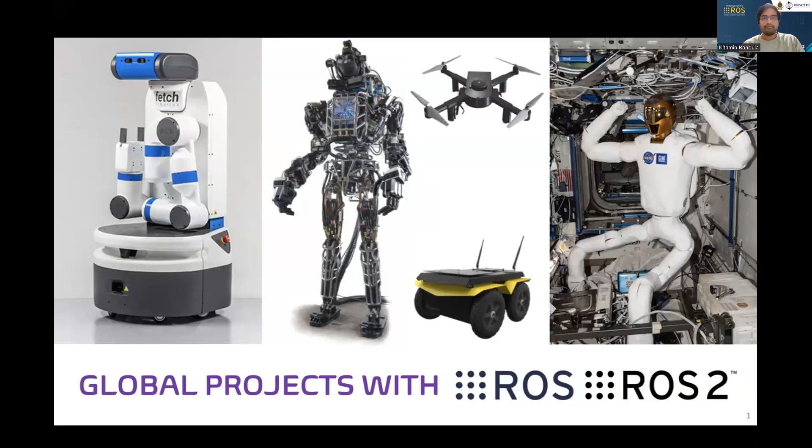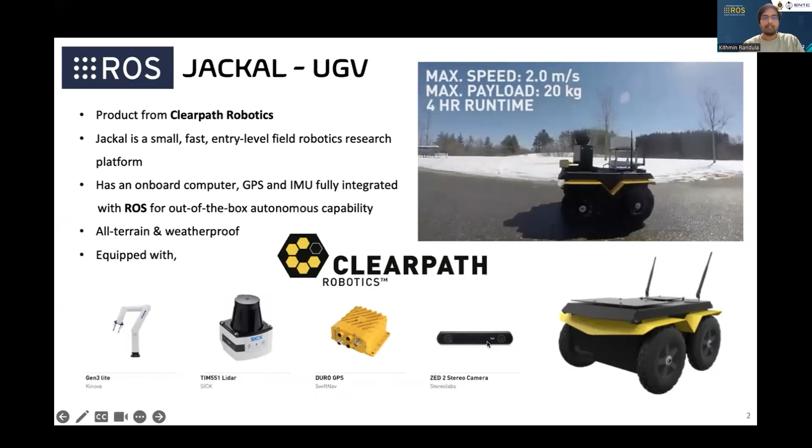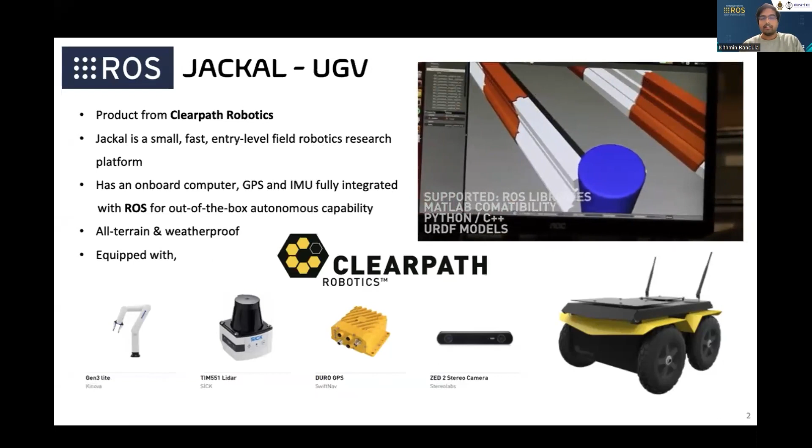The first project I want to present is done by Clearpath Robotics. It's a product, an unmanned ground vehicle called JACKAL, a fast-moving robotics research platform equipped with cool features like a manipulator, LiDAR sensor, GPS, and stereo camera. It's an all-terrain, weatherproof device, quite neat. Clearpath Robotics is located in Waterloo, Canada, and it's a startup that came out of University of Waterloo.

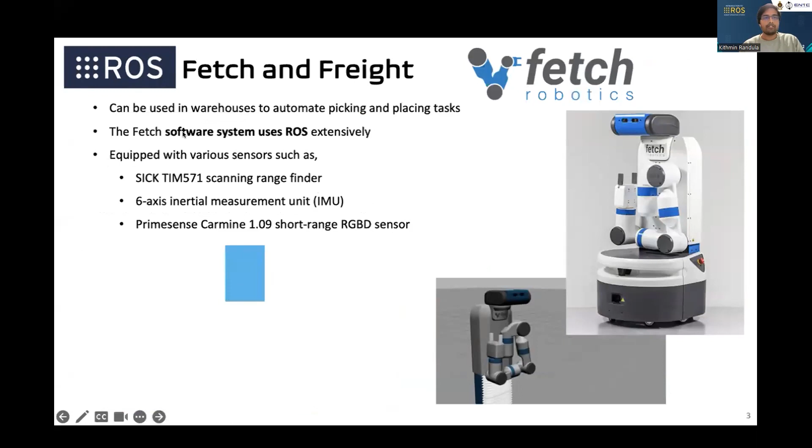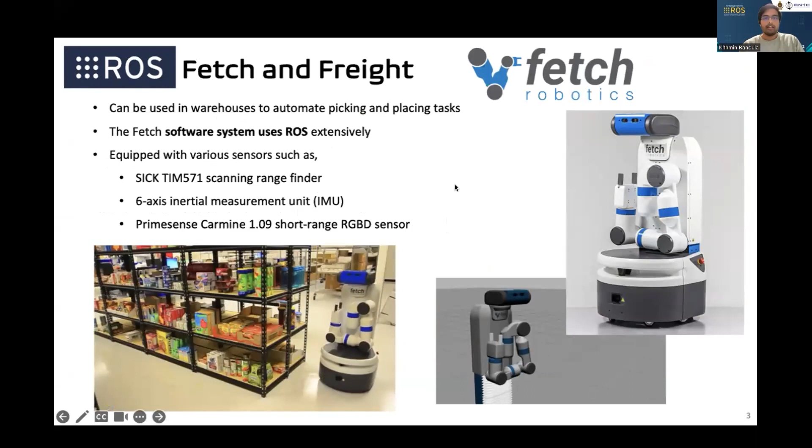This robot is very handy, used in warehouses for automatic picking and placing. It's called Fetch, developed by Fetch Robotics, and it's available in ROS, extensively using the ROS platform. It has a rangefinder, IMU system, and a short range RGBD sensor for color detection.

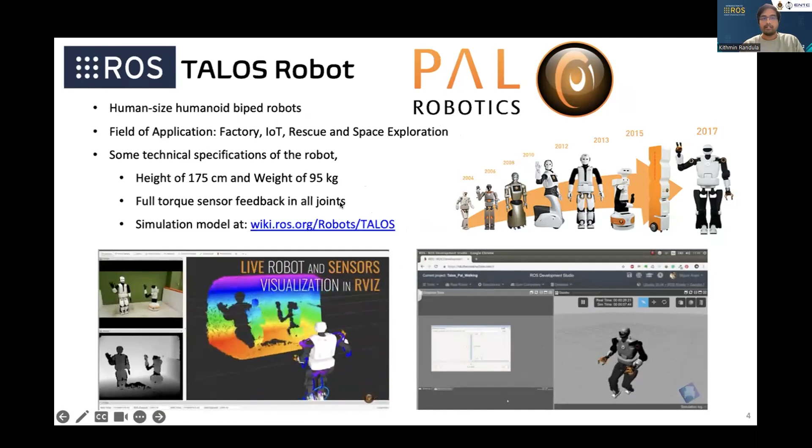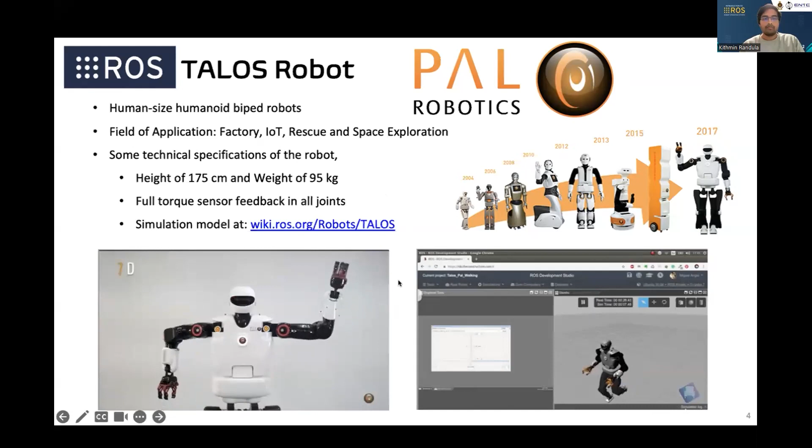I also have some humanoid robots. This one is called Talos, designed by a very successful company called PAL Robotics from Europe. This robot is actually the size of a human and around the weight of a human as well, which is pretty nice. You can read about this robot and its simulation model, and you can see it's been developed for a long time, really innovating and mastering many aspects of humanoid robot development. It's a great company, really leading in humanoid robotics development in the world right now.

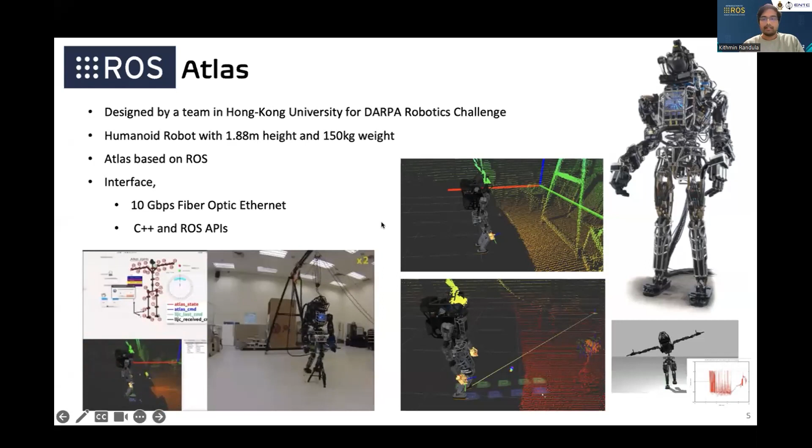This is a cool project called Atlas, done by University of Hong Kong for the DARPA Robotics Challenge. It's a little heavier than your typical human, and also a bit more robust as a humanoid robot. It's quite based on ROS as well, and you can see the simulations and the work that's gone into Atlas—quite a complicated humanoid robot, I'd say.

This is a really interesting ROS project from a company called GaiTech, called GaiTech Copter or Gapter for short. It has the ability to fly indoor and outdoor, doing lots of mapping and sensing. It has a Pixhawk control platform, an Odroid single board computer, a laser scanner, and 4G internet connectivity. This kind of platform would be ideal for supporting IoT on ROS case studies, which someone asked about earlier.

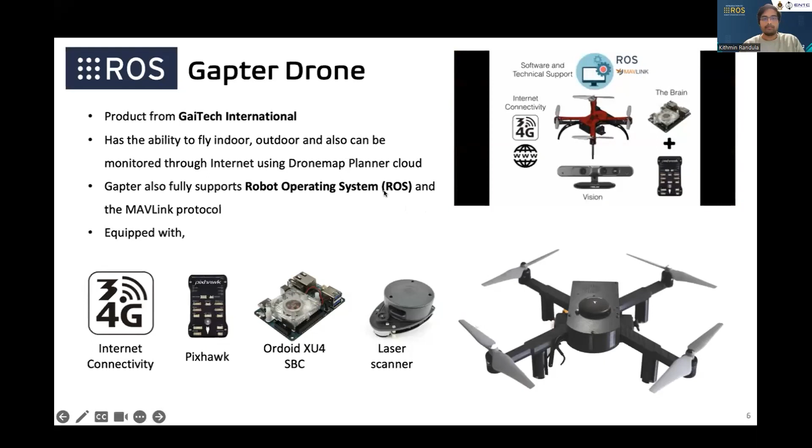This is a nice example I found that I wanted to introduce. This Shadow Hand is developed by a company called Shadow Robot, and it's been used in many open AI and machine learning case studies, mainly by OpenAI and Google Brain. OpenAI was founded by Elon Musk, and Google Brain is Google's AI department. This arm is doing a really cool task here—solving a Rubik's Cube with a robotics hand. That was the experiment we were working on.

There's this nice article—sorry, are you able to see this?

Okay, right. I think I made it.

So this is the article I was presenting, solving Rubik's Cube with a robot hand. They have a lot of nice outlines about the project they did, and there's the sequence that this robot actually follows.

It's completely solving the Rubik's Cube by itself, with image processing happening in the back, and all the commands being sent from the AI algorithm back to the robot so that it manipulates the Rubik's Cube accurately. Those shining dots are the pointers I'm talking about, captured by a camera and sent into the reinforcement learning algorithm that manipulates the arm.

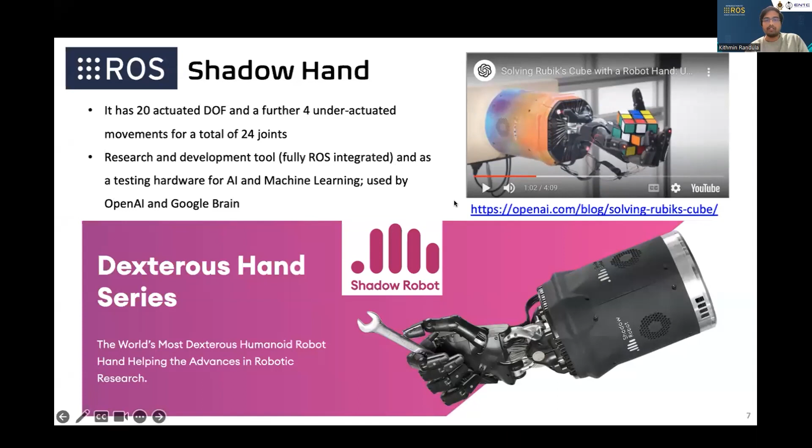So it's really cool, right? These are the things that ROS is working on.

To add even more excitement, ROS in space is the next up and coming thing you're probably waiting to witness. This really speaks to the impact ROS has had in research and industry, because sending ROS to space, or NASA adapting ROS, is a big confirmation of how important this operating system is. And it's been less than a decade since it was introduced to the world.

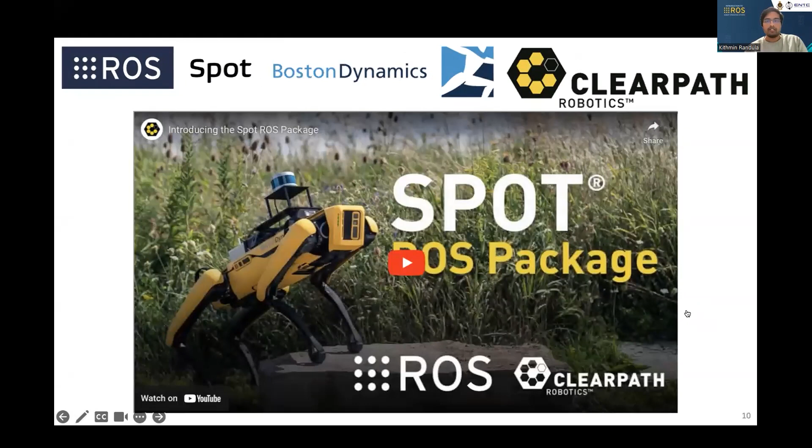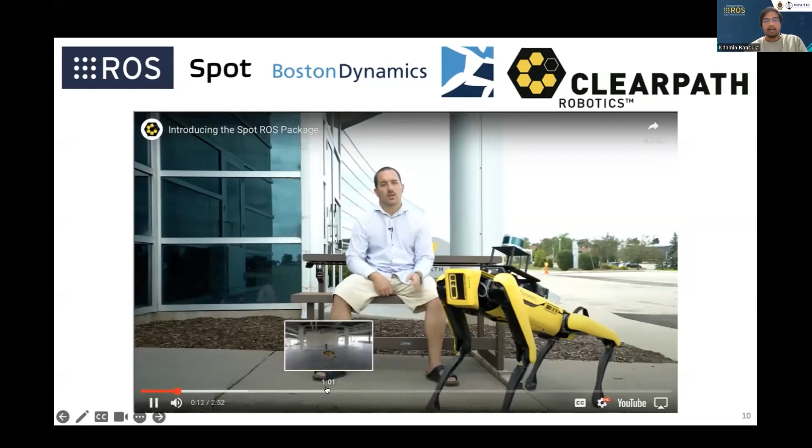One more thing about robots, two actually. This is Dave from Clearpath Robotics, and I think you know this robot, the black and yellow one from Boston Dynamics. This is Spot from Boston Dynamics, and we're happy to announce that we've released a ROS driver so you'll be able to use Spot on ROS, with the ROS Spot package developed.

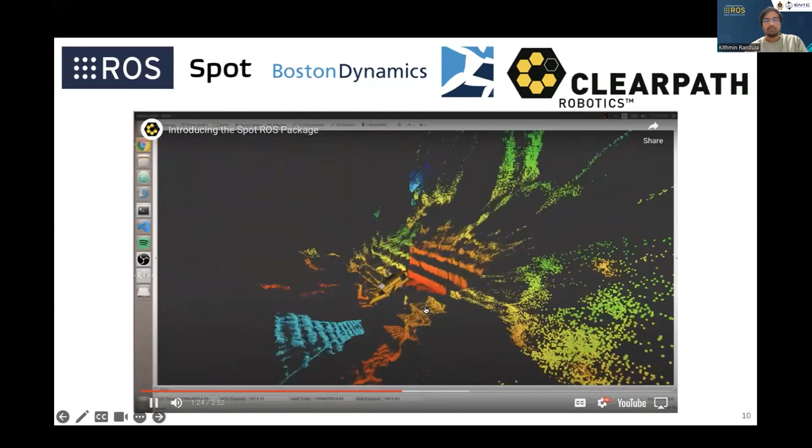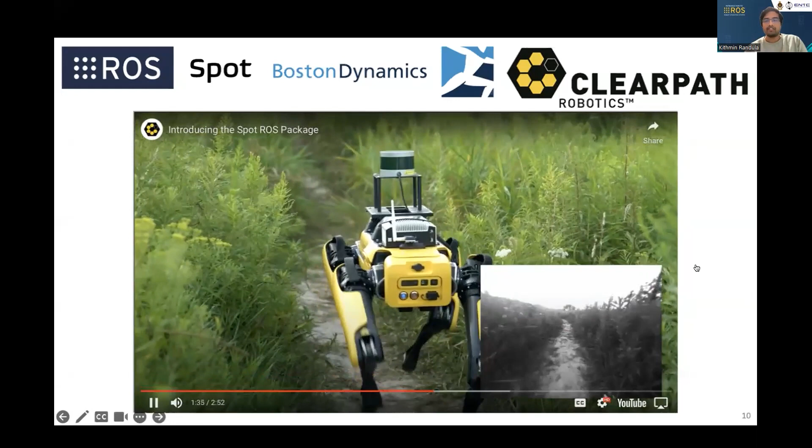You'll have all the functionalities and tools you need to use Spot with the ROS package right now for robotics development. You can check out the video, it's really cool, and the things Spot can do are really cool. It can even do dances for different songs. There are lots of videos by Boston Dynamics on that, so check it out when you have time.

The really interesting thing is Spot is actually a $74,000 robot, but China has been in the game of designing their own quadruped robot called Cyberdog, and they brought the cost down to 1,500 USD. These will probably sell off the shelf really intensively, and I think any home could probably afford this kind of Cyberdog robot. It's very exciting to see what happens once these robots get commercialized.

It also supports all the navigation, mapping, and obstacle avoidance functions. Since it's adapting Ubuntu, Cyberdog supports ROS as well. So I'm really looking forward to what's happening in terms of that.

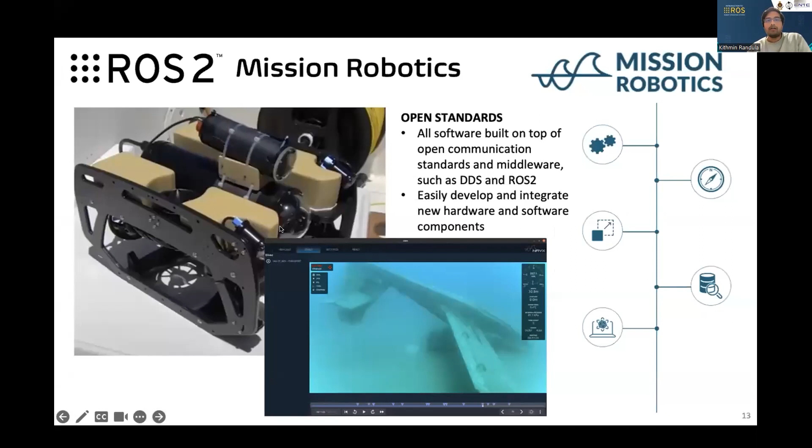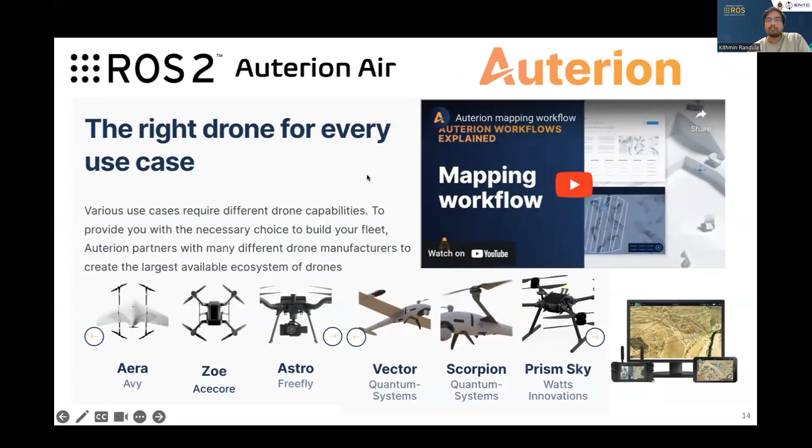Some projects show that ROS 2 has already been implemented in commercial projects. Mission Robotics has their own ROS 2 supported submersive robot that goes underwater, and there's a platform that supports drones as well, based on ROS 2 support.

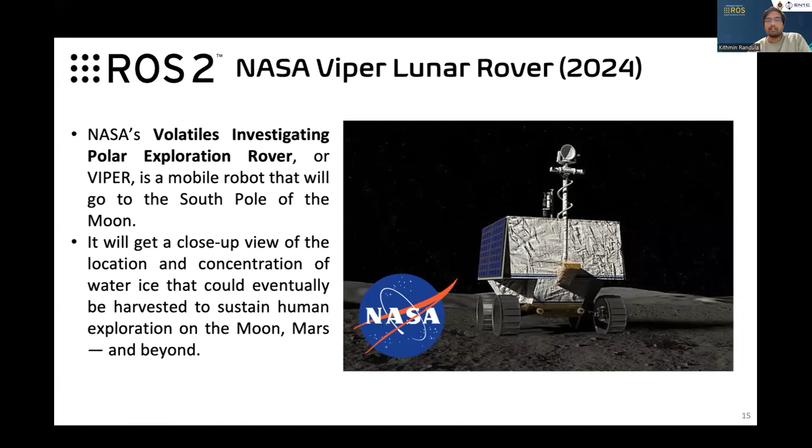NASA also has another project coming up in 2024 called Viper, a volatile investigating polar exploration rover. It's probably going to be used to eventually locate and concentrate water ice on the moon, and eventually harvest it for human-sustaining explorations on the moon, Mars, and beyond. That's a huge deal in terms of space exploration advancements, and ROS 2 is taking part in it.

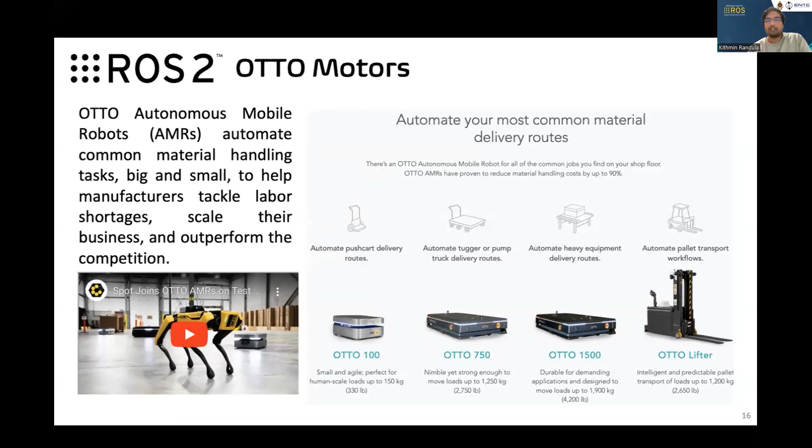Finally, this last project on ROS 2 called OTTO Motors is kind of similar to these warehouse robots—a huge market that Amazon and big warehouses are taking advantage of, and ROS 2 has gone into that domain as well. So in both industry and research, ROS 2 is creating a lot of excitement and developments. Very nice to see this.

Finally, something most of you might be excited to hear: ROS 2 has actually gone beyond to introduce micro-ROS, to put ROS 2 on microcontrollers. So if you have your typical Arduino, Pico, or Raspberry Pi Pico, you can actually use the ROS 2 stack to implement different projects on your device.

One person asked about IoT support on ROS—having these kinds of functionalities definitely allows you to go for that.

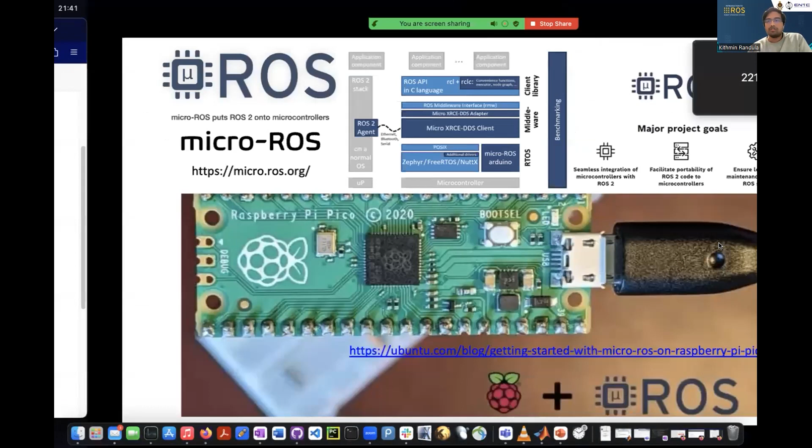That's probably what you ideally want in terms of developing this forward. So that was a short session I wanted to do about global projects and where ROS is going.

As Dr. Peshala mentioned, ROS has now been taken under the wing of Intrinsic, a company owned by Google. Open Robotics and ROS will be going forward, but ROS and Gazebo will stay independent under the OSRF. So it's quite exciting to see what's going to happen in the future in this domain.